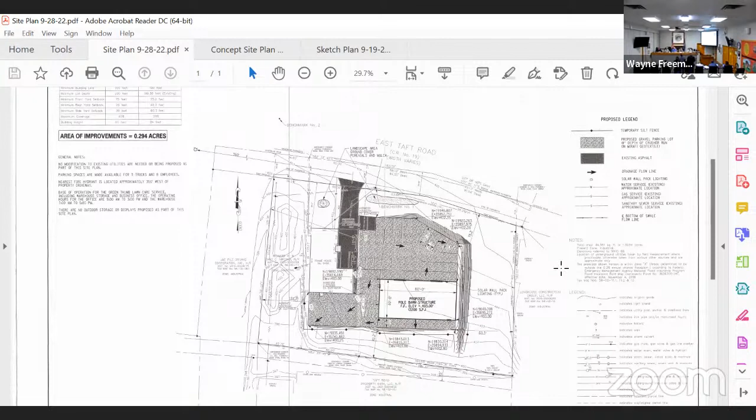Mr. Snyder? I can't see where the handicap parking spot is. Can you point that out for me? Yeah, it's right in front of the existing garage there - you can see it. This one doesn't show it, but the new plan I provided shows the spot. We added the handicap spot right there on the existing asphalt driveway.

Now you normally don't have people coming to your facility? No customers, just employees that work with the company. Okay, since you have the handicap spot on the pavement, I think that's fine - we at least try to keep the handicap spots on pavement. Even if it's one of your employees that would park there, we like them not to have to deal with stone, so I replaced it on the asphalt, existing asphalt, as close to the building as you can be.

You nicely mark out the parking spots, but on gravel it's not going to last very long, striping it. No, those are the parking spots needed space-wise. Now, based on how many employees do you expect to have? Well, there's 8, and they're there for an hour, then there's 2 the rest of the day, and then 8 there for about an hour at the end of the day, just to pick up the truck - you swap the trucks and go. Well, I mean, they drive their car to your facility, then get out of their car and get in one of your trucks.

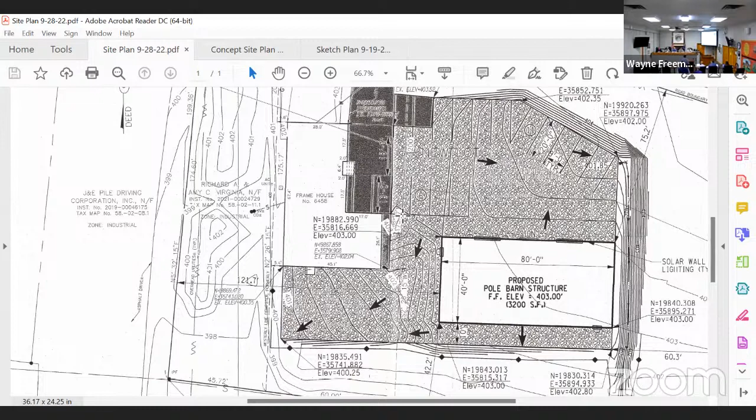Welcome back, gentlemen. Welcome.

Just want to make one point though, that Royal Car Wash has merged with Go Car Wash, so it will have Go Car Wash branding on there, but it's still obviously the same people from Royal Car Wash, and the building's gonna look exactly the same. So just the lettering for Royal Car Wash is gonna say Go Car Wash, but just wanted to make sure that everyone's aware of that.

So we're here looking at a site right now, we're just in the conceptual phase. Can you give your name please? Oh yep, sorry, I'm David Cox with Passero Associates, civil engineer for the project. And I also have with me Alex from Royal Wash Development.

So the property is just south of Copper Top Tavern. It's 901 North Main Street, 903 North Main Street, 5643 Bear Road, and 5647 Bear Road. So in that proposed green area and development area, there's 4 separate properties, there's 4 separate buildings on there. So the plan would be to demolish all those buildings.

Right now, the site is essentially currently all paved. There's very little grass on the property. So we would be tearing up a lot of that asphalt, reintroducing grass, especially along Route 11 and Bear Road, giving a little better streetscape on there, adding some trees and things like that.

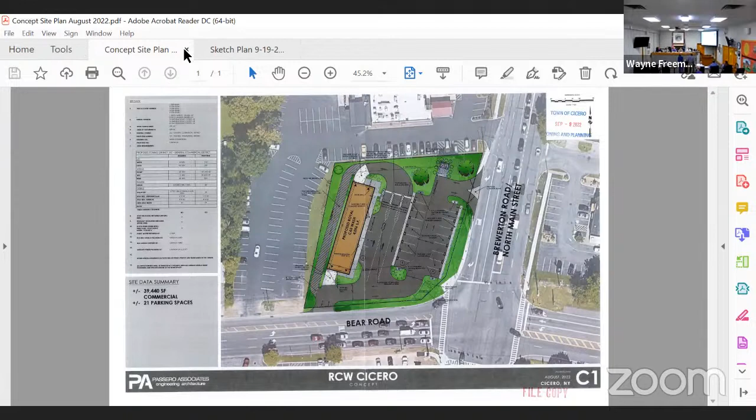The last agenda item is for a proposed photovoltaic solar park at Mud Mill Road.

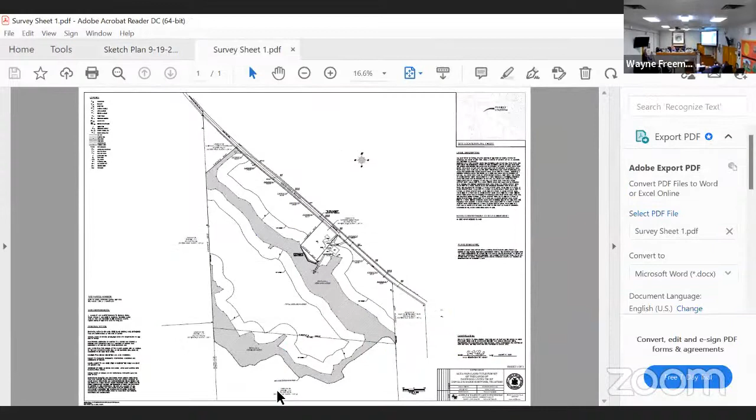We looked at the visual impact from a number of different locations along Mud Mill Road and from the interstate. What we found was that the view available at Mud Mill Road was from about 3 different locations, shown in the drawings as location A, B, and D. From that, we set up a target similar in height to the arrays.

From that, we developed these projections of what you might see from the roadways. So this is what you would see here, image D. Image D shows the poles that Dave talked about, the utility poles required for the interconnection. These other two locations, A and B, from Mud Mill looking to the east and to the west, you might see images that look like this.

Here we've superimposed what the array might look like. If there was an interest in doing some screening, there could be an attempt to do some landscaping out front in order to soften the view of that array in the background.

Okay, thank you. And the subject of reclaiming the property after 25, 30 years.

Yeah, there's a decommissioning plan included with the submittal, and it talks about how the property is basically an attempt to bring it back to the condition it's in today. So the soil that is removed is limited to soil related primarily to the road construction and to the stormwater detention basins.

That soil gets stockpiled on the property and is maintained during the life of the array. At the time the project becomes ready to be closed out, the road would be boxed out again, this time in an attempt to remove the material that was used to construct the road. That would be hauled off site.

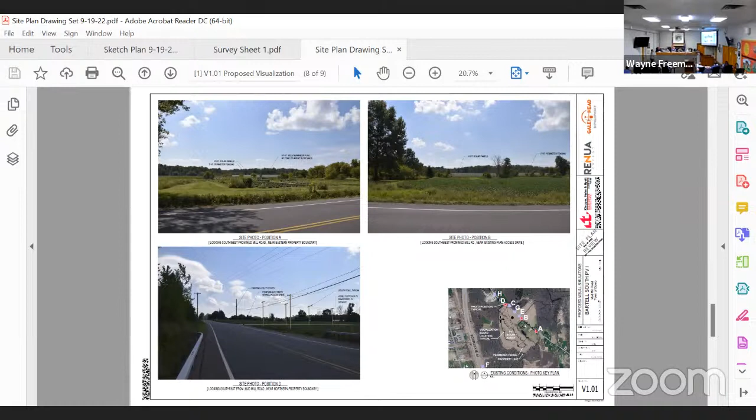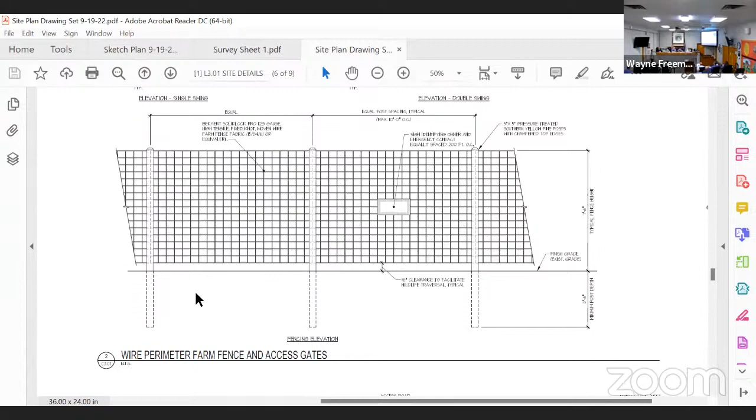Is it climbable? That's my concern. There's no top rail on it, so that does discourage climbing, though someone could. But it's as secure as a chain link fence in that regard. It meets the electrical code requirements, and we think it's beneficial to the community as opposed to a chain link fence.

Will there be safety signs about what's on the other side and not to climb? The town code actually calls for minimizing signage, so we would put up all the placards required by the National Electric Code and leave it at that. But it would be controlled access, with signage including emergency contact information.

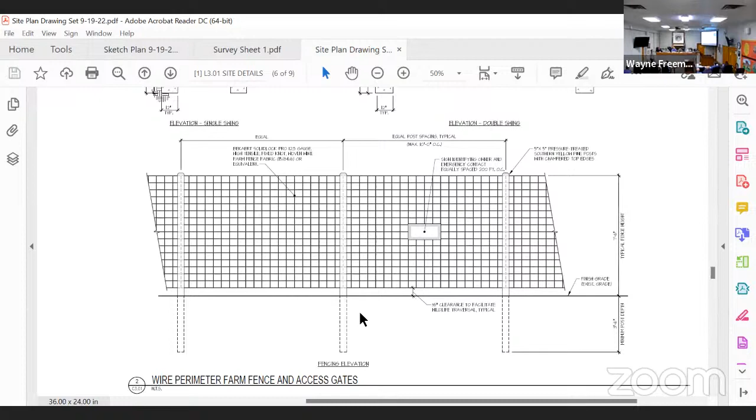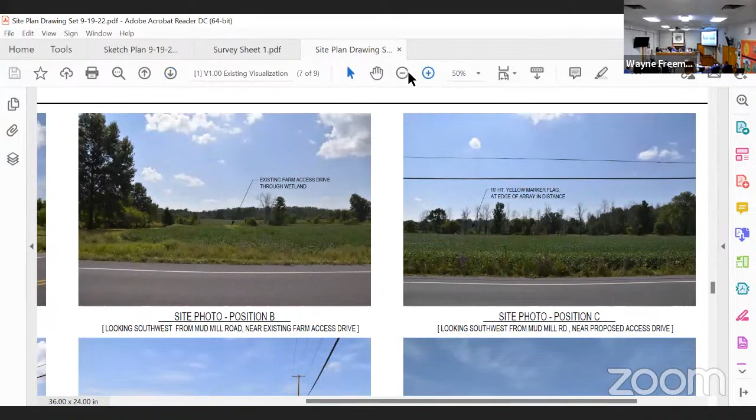I know you had done the visibility study—this one with the poles is really all you can see. You're not actually going to be able to see any of the panels or fencing from the road? Some of it you can. There is some visibility, and it's a little hard to see because we're simulating from the road.

Is it in this photo section? I believe it is, yeah. I believe this image, and then you can see in the background here. Is it this one, the next one? Same here. So we took photographs.

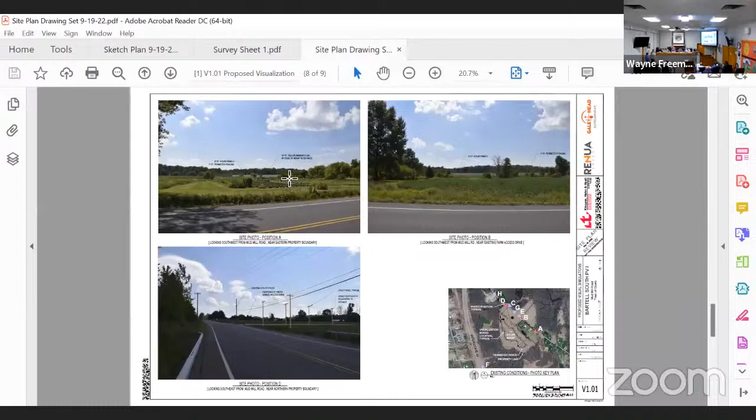You do set back a little ways though, right, from the road? We are set back because we're on the far side of the swale, and we're also assuming a 100-foot buffer from that swale, so we're hundreds of feet from the road. Okay, I see it now—all the panels that you can still see from the road.

I guess I would like to see more, like an increase in the amount of landscaping and stuff to try and limit how much you can see from the road—break it up.

If it's acceptable, we would probably place them along the eastern side of the swale. There is existing vegetation and trees in there, and that would look the most natural as a buffer. Because the farmer plans on... even right now, especially when there's vegetation around, not very much is visible.

I live across the street. Can you approach please and grab the mic? I'm sorry. That's okay—we're being recorded and people are watching.

Even right now, you can't really see very much back there. I live at the residence that would be most likely to see as much as possible, and even from my angle there's not very much. There's so much vegetation along that creek area already, and especially when it gets into later spring and summer, it's so thick that unless you're looking for it from the road, you're not going to see a whole lot.

You're in the structure right in the middle—that's my dad's house. I'm up the road a little ways across the street, so I'd have the most unobstructed view, and it's really not a whole lot that I can see past that creek and pond as it is.

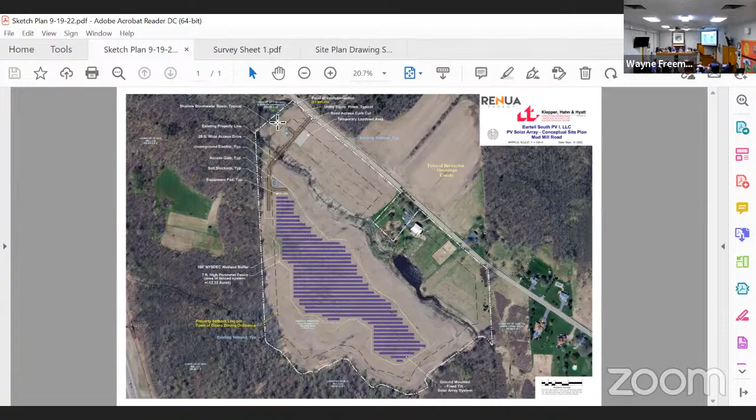All right, thank you all for your time. Thank you. He'll even give you a card.

So that concludes our agenda. I did have some conversation with Mark, and Neil brought up the draft agenda, and there's been some items on there that have been kind of lingering around. So I thought we'd have a discussion here about whether to send notices out, or some of them we've done already, right? Like Pepsi, we've already contacted the applicant. And so it may be time to send them a written notice and say, you need to provide new information, or we're gonna consider the site plan abandoned.

I agree. You want me to go through the list? We've got Speed Pro Imaging, that's Pepsi. It's been around for a long time, so they should definitely get that letter, I would think. Who last communicated with them?

They indicated they wanted to make the Pepsi can picture. Yeah, when I communicated with them last, they said they intended to come forward with more information, but that was probably a year ago. Right, exactly, almost for sure. I think they may be coming forward with a project, something else too.